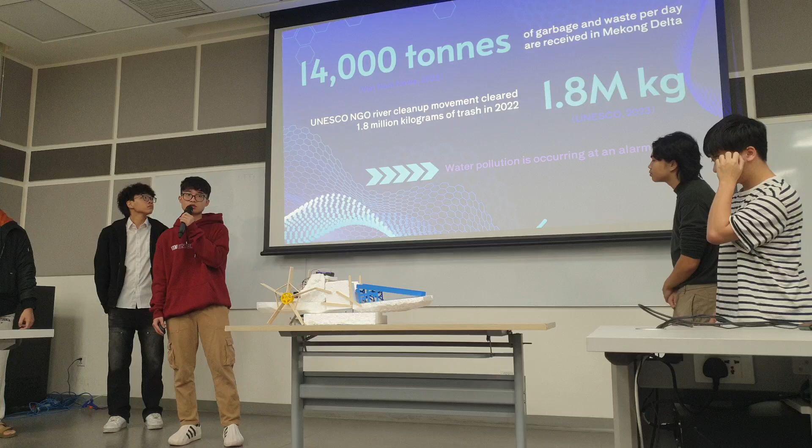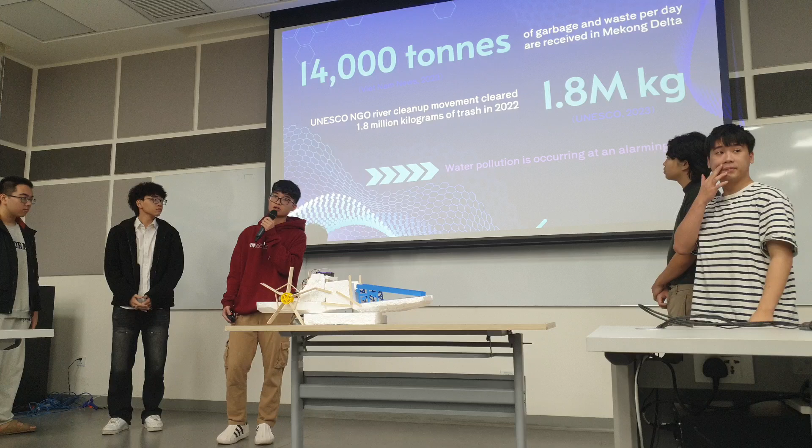So first is about the project background. According to the Vietnam News in 2023, there are 14,000 tons of garbage in the Mekong River per day. And according to UNESCO, in 2022, we had to clear up about 1.8 million kilograms of trash in the Mekong River. So with all this information, we can know that water pollution in Vietnam is at an alarming rate.

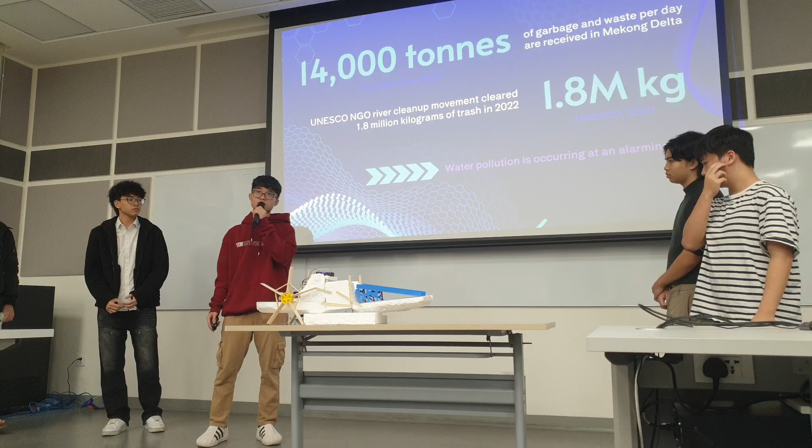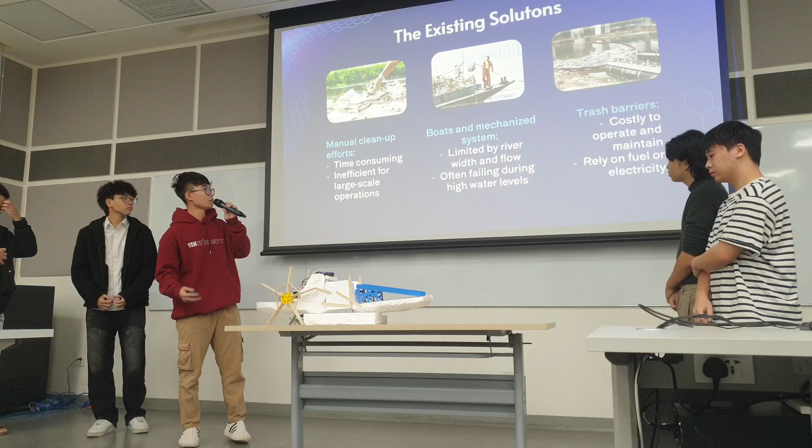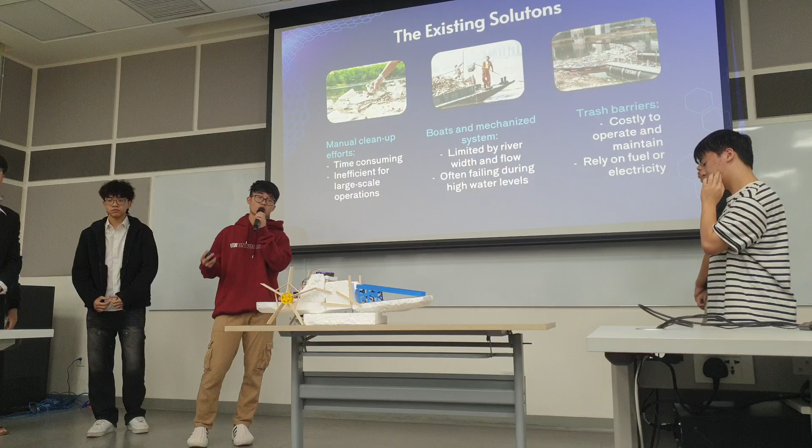There are some existing solutions to improve water quality. Here are three obvious examples. Manual cleanup effort costs a lot of time and is inefficient for large scale operations. The boat and mechanized system is limited by the river width and flow, and it also usually fails during high level waters. The last is the trash barrier, which costs a lot of money to operate and maintain, and also relies on fuel and electricity.

So the next part will present the project definition and objectives.

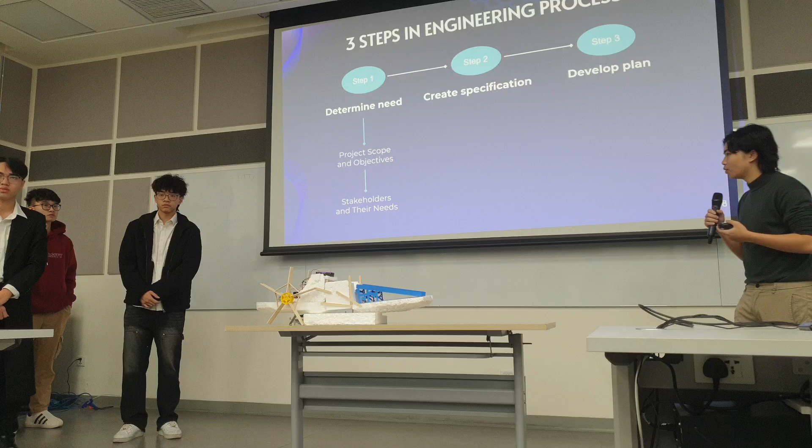So there are three essential steps in engineering: starting with the first one, determining the needs, creating a specification, and developing a plan. When we're talking about determining the needs, we first need the project scope and objectives - where we want to do the project and our targets on what we are going to achieve, and we have to mention the stakeholders and their needs.

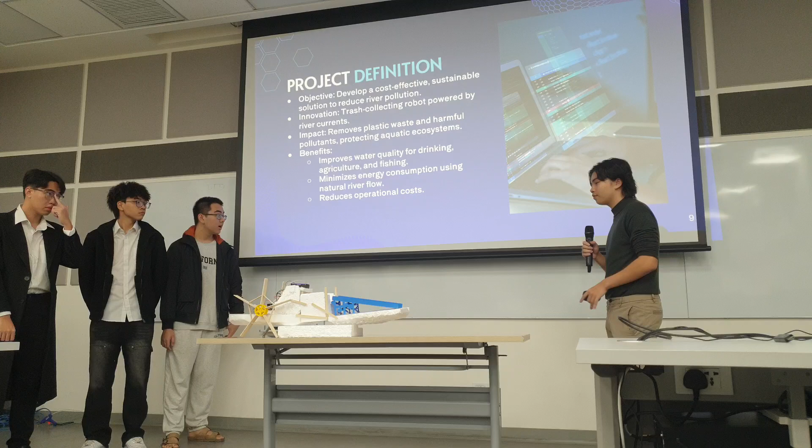For the project definition, our objective is to develop a cost-effective, sustainable solution to reduce river pollution. Our innovation here is a trash collecting robot that's powered by river currents. The impact we are hoping for is to remove plastic waste and harmful pollutants and protect aquatic ecosystems. The benefit of our system is that it improves water quality for drinking, agriculture, and fishing, and minimizes energy consumption using natural river flow. The operational costs are also marginally less expensive than the examples shown before. Our project objective here is to generate a positive effect in diverse river and lake environments.

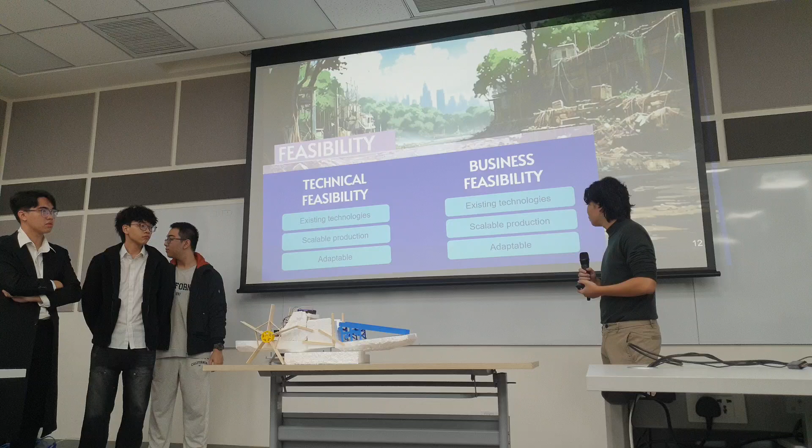Onto the system design, which is presented by Ben. First we have to define the functional specifications and non-functional specifications, which was created in a report.

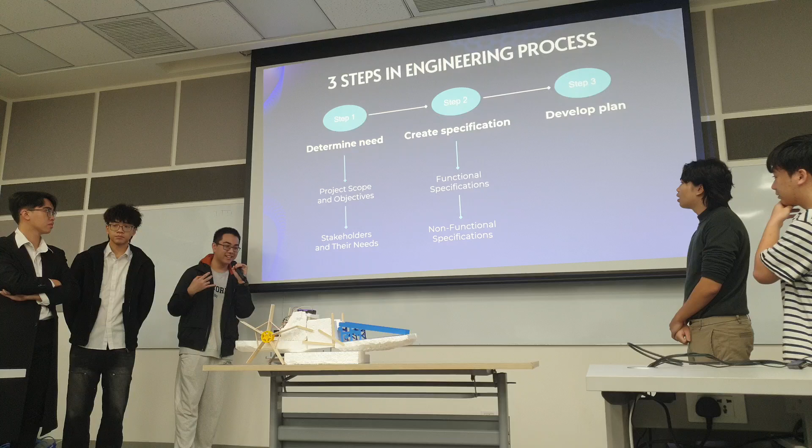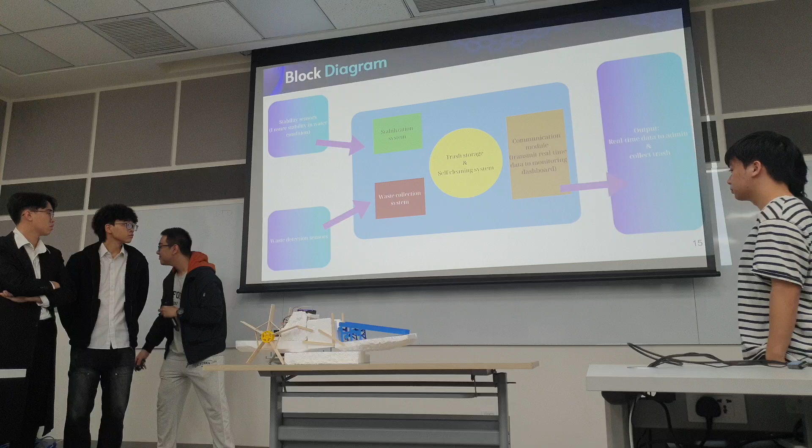So we're going to break down each of these systems. The navigation and control system allows the machine to traverse the water environment. The waste collection system allows the machine to process what is trash and what is not trash, and allows us to pick up only trash. The trash storage system allows us to separate the trash, and will allow us to not only collect the trash, but maybe differentiate the trash type, and also allows us to gather data from the environment.

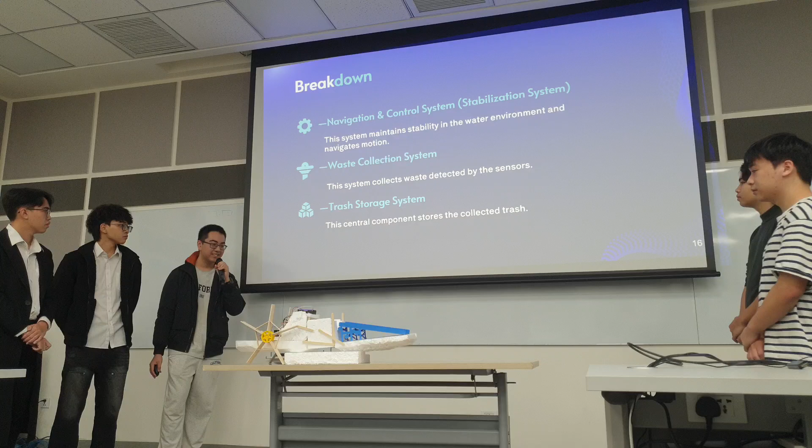For the design of each block, the processing system has 2 lithium-ion batteries for the power supply, which is turned on with an on-off switch. The main processing system is an Arduino board with communications to a DC motor driver, which controls 2 motors. Each of those motors have a propeller, and the machine is controlled through Bluetooth for wireless communications.

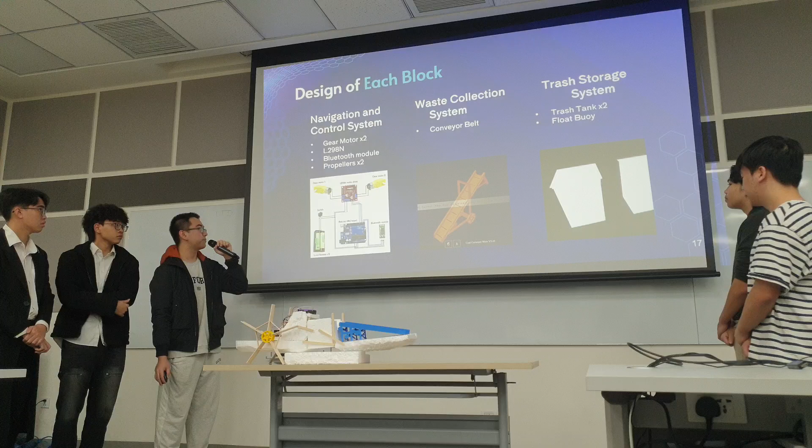The waste collection system features a conveyor belt to pick up the trash, and the trash storage system is just polystyrene trash tank, which also features as a float buoy.

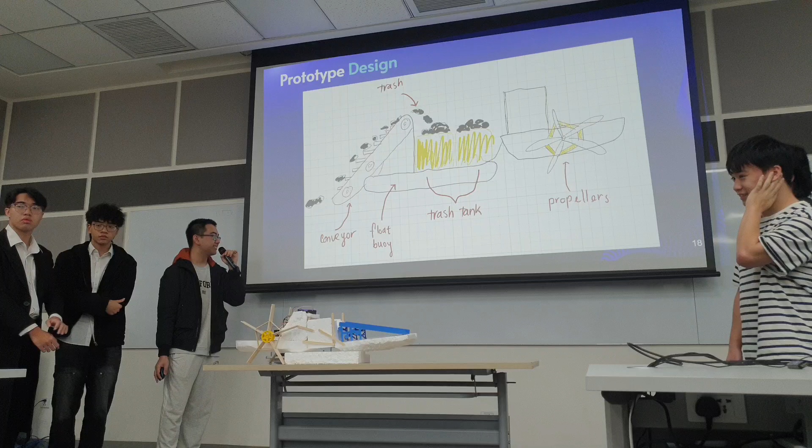So the prototype design is shown in this demo. We decided to choose the Bluetooth module because it features low latency and allows control from afar, it's cost effective, and most importantly, it doesn't require a password.

We also decided to choose the conveyor belt instead of the flat belt system, because the flat belt system requires friction to work to pick up the items. We decided to use a polystyrene trash tank instead of 3D printing the trash tank, because it allows us to float the machine as well.

So we'll leave the next part to her. Alright, so now I will mention the testing and analysis of the prototype.

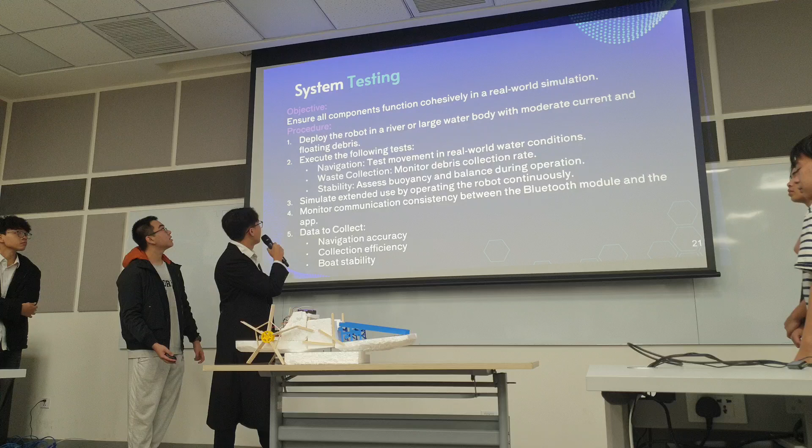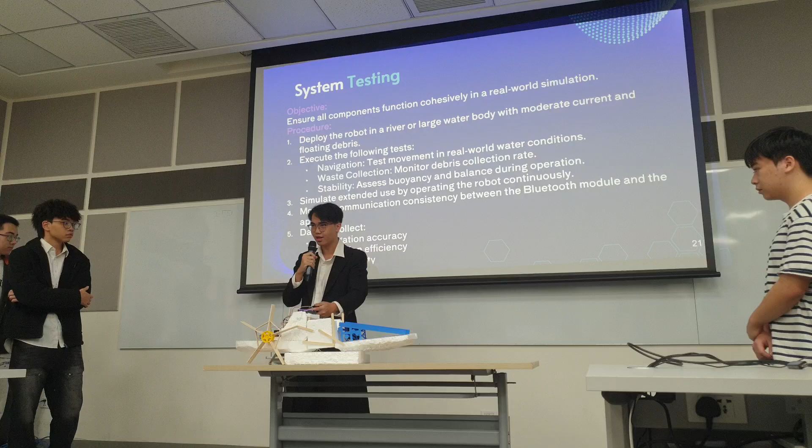So to sum up, we have this product, just simple, because we haven't developed the AI model yet to achieve autonomous driving. So we will develop a control system via Bluetooth using an app to control the boat, moving it to the beginning of the river, where it will stop and wait for the river flow to push the trash onto the conveyor belt, which will move the trash into a trash tank.

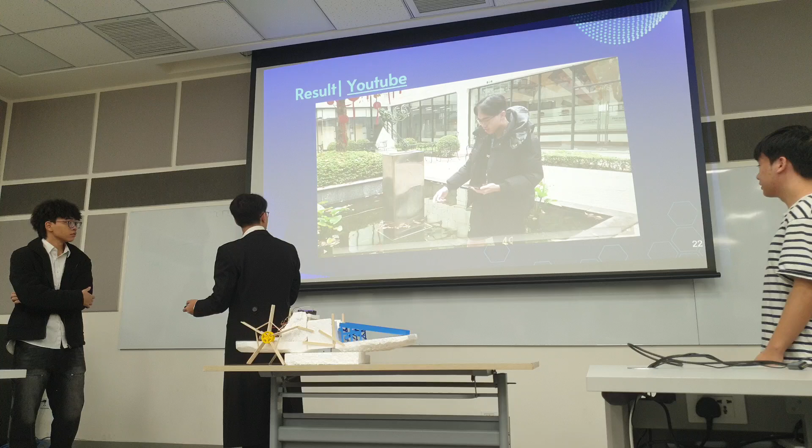Right, so here's the demonstration of our product.

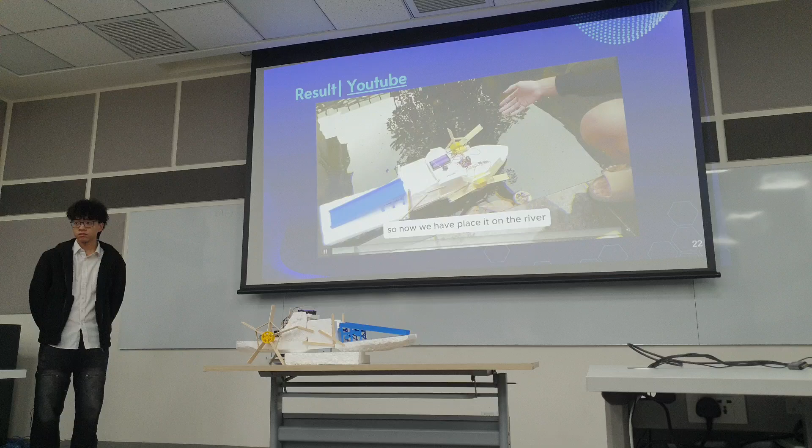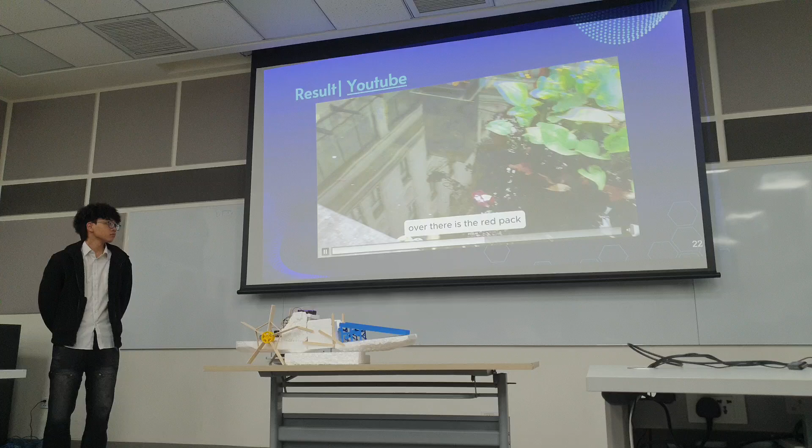So as you can see over there is the red pack, which is the trash that we want to collect. We want it to move into our conveyor. So now I will demonstrate to you how we will collect it.

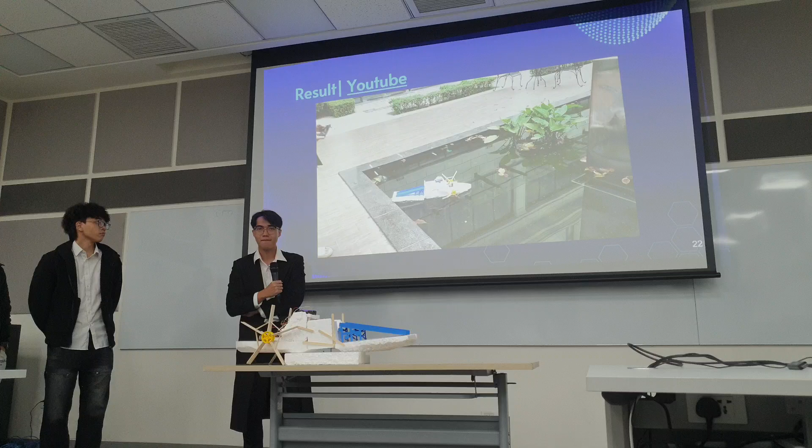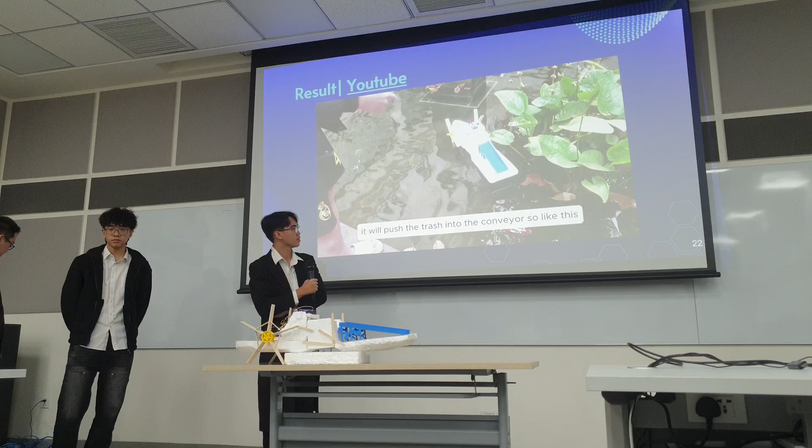So, to the right, hold it, left, hold it, turn left, okay, stop here. Now, as the river flows, it will push the trash into the conveyor, like this. Let's see how the trash will move into the trash tank. Okay, check that out.

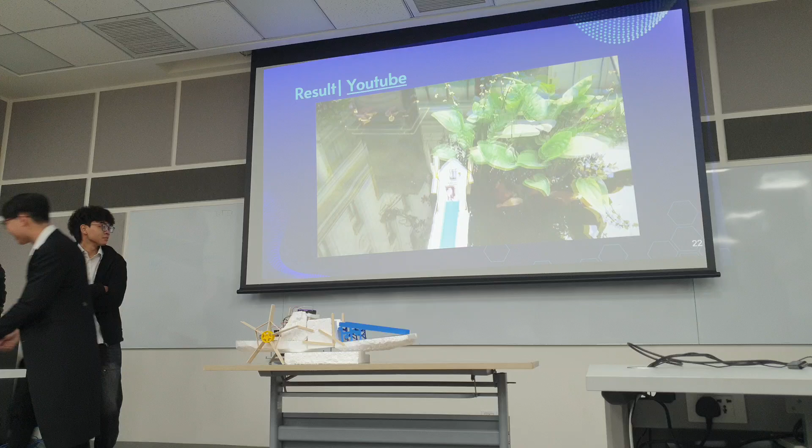Q: How do the sensors work in your system? A: As I mentioned before, since we haven't had enough time, there are no sensors. It's just a very small function to move the boat.

About the outcome, navigation accuracy is pretty high because it requires human control, so 90% for it, with 10% of failures occurring in areas with a high density of obstacles.

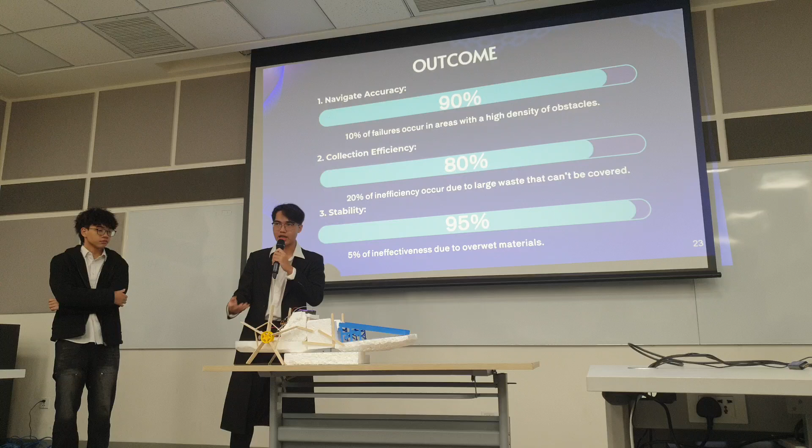Collection efficiency is 80%. The remaining 20% of inefficiency occurs due to large waste that can't be covered, and since it hasn't implemented the AI detection model and sensors, it's not really efficient.

About stability, it's about 95%, since you can see that our boat didn't sink, so that's a really high accuracy of stability.

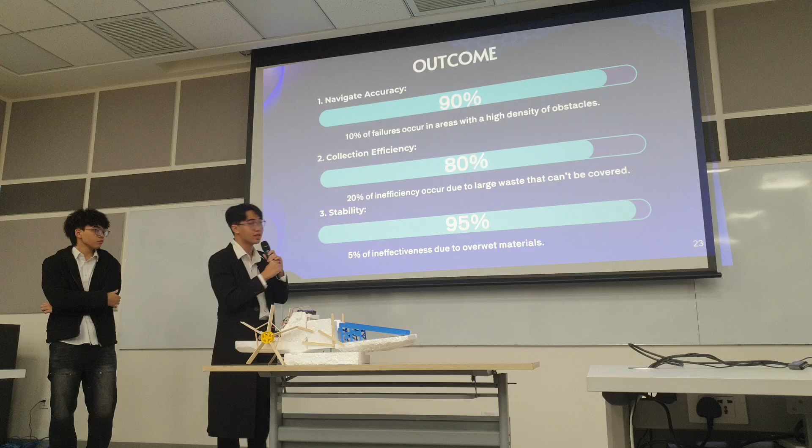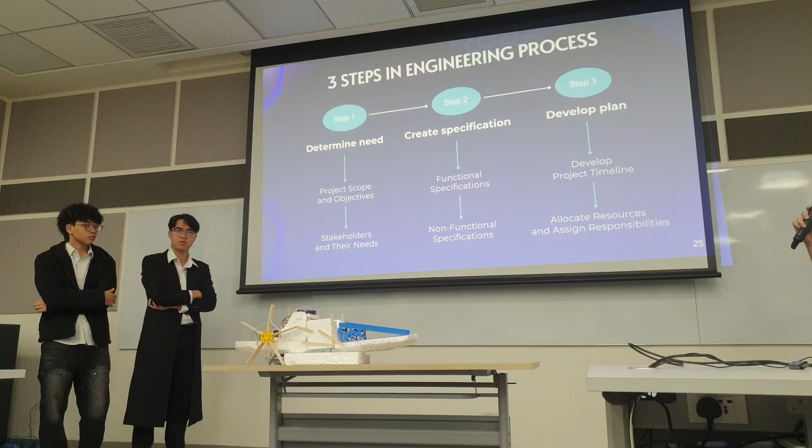Next part is the project management. For the last step of the engineering process, we had to develop a plan. This included developing the project timeline, allocating resources, and assigning responsibilities to each task. Here's our task table.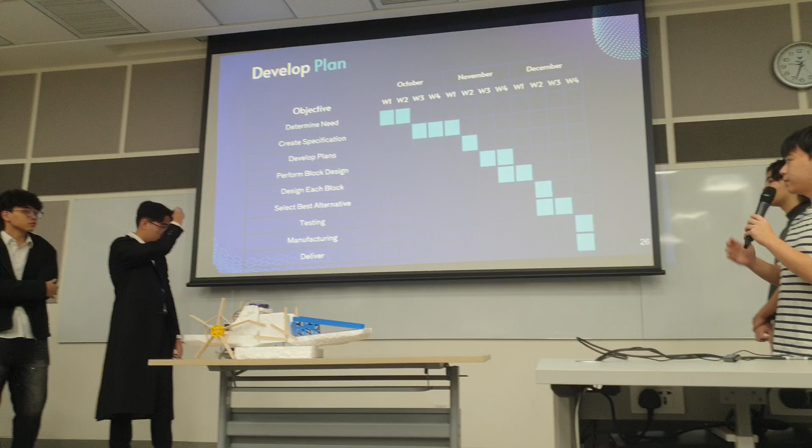We took a total of 5 weeks to develop everything, and the remaining time we spent developing the plan and making the prototype. In reality, it took around 3.5 months. In the last month, we only wrote the report, so we did not include it here.

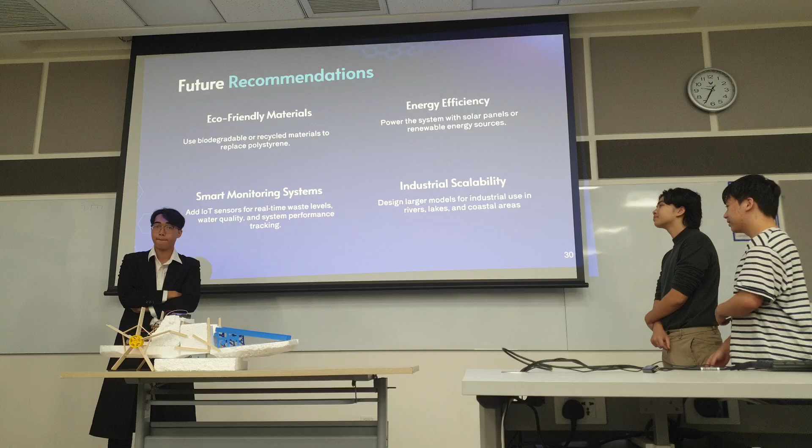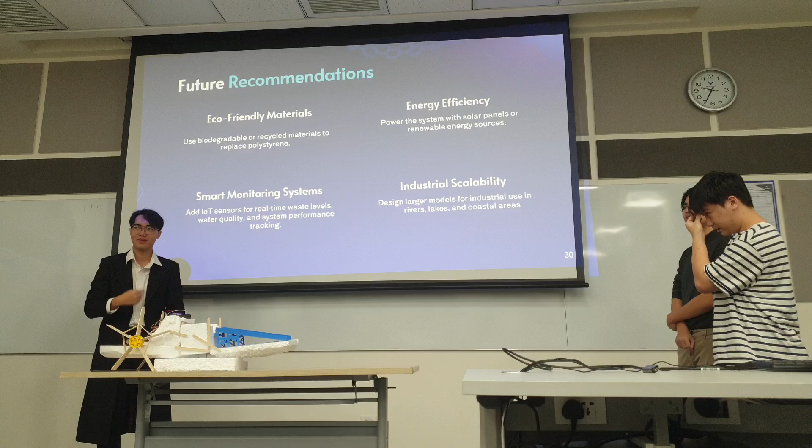Lastly is the conclusion. Our prototype has the following advantages: it is an innovative waste collection solution, it has an efficient design, user-friendly control, and is a scalable and versatile solution. However, there are still some limitations to this prototype, which we want to address with future enhancements, such as promoting more eco-friendly materials, improving energy efficiency, developing smarter monitoring systems, and improving industrial scalability.